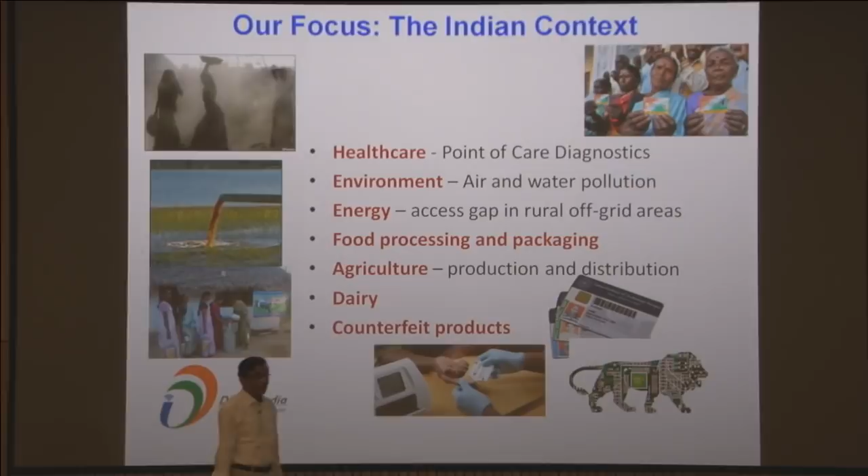This is being done all over the world, but being in India, our focus is of course the Indian context. So all these areas, healthcare, environment, energy, food processing, everywhere this technology, as I will illustrate, can actually revolutionize the field.

And what we have at the center, I will quickly go through, because I am speaking on behalf of the center, and everything that I will show you has been done by these 100 people working behind us. So we have components. I'll explain some of them. The major thing in electronics is we have components, but those components have to be integrated into applications. All right.

So we have been working not merely last year or 2 years before. This center has its beginning in year 2000. So we have been at it almost 18 years. First 5 to 6 faculty members with 10, 15 students, and now we have about 7, 8 faculty members, team leaders of 12, 13, and with 120 people. But it's 18 years of journey to where we are at the moment.

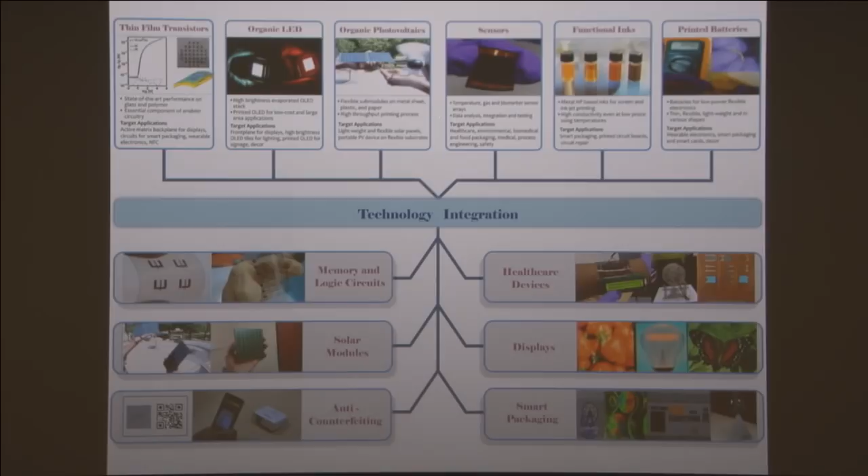In the next 60 minutes or so, I'll tell you why flexible, and worldwide efforts, what kind of efforts are going along, and give you a primer of the key problems. I will not do very complicated applications; semiconductors that you have studied, we will also do that. And so we will do materials and inks, and it is flexible. Once it becomes flexible, we can print. So printing electronics I'll do, and I'll summarize with current challenges. That's our task. Let's go.

So diodes. You have seen components like this, diodes, transistors, but these are discrete. And then if they get integrated, they become, what is it called? Integrated chip, IC, right? So can anybody tell me how many transistors a typical computer chip, a Pentium chip, has in it? Have you studied? Has anybody told you so far? Pentium is a computer chip, right? How many would you guess?

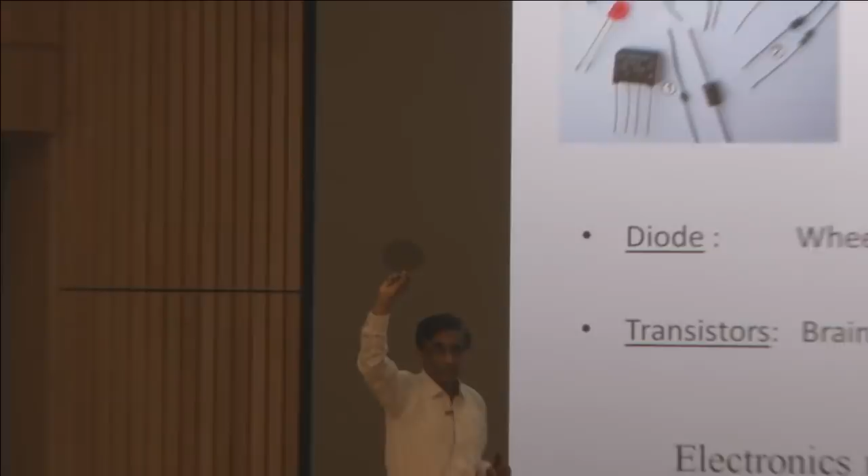And you know, humans lived in the Stone Age, correct? And after Stone Age, which age came? Iron Age. Some people call the recent age the Steel Age, for the amount of steel that we use. But what is our age? Can you name a material which will characterize our age? Stone? Brass? Steel? Okay, I'll hold something in my hand. Can you tell me what is this? Glass? So somebody is saying it, so I think they deserve a chocolate.

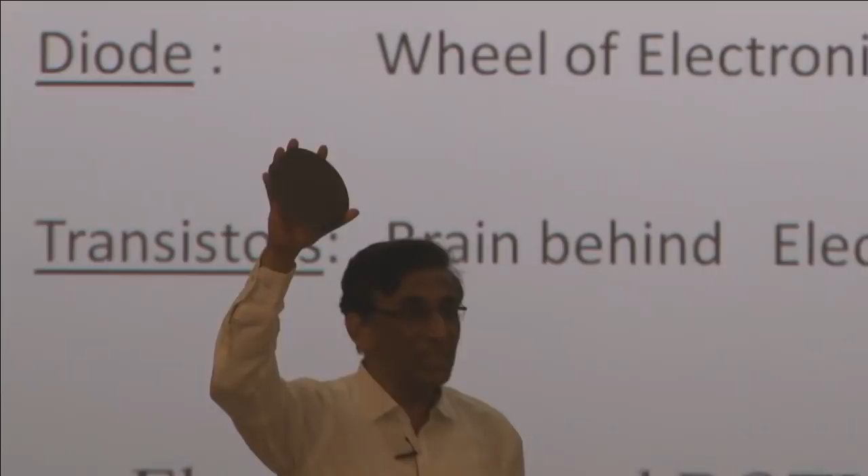This is a 6-inch wafer of silicon, on which you would have many computer chips, like 1,000. This comes in 6-inch, 8-inch, 10-inch, even 12-inch now. And so all your computers are made on top of this, and then they're split and put into a computer. That is why it can become so cheap. You can make thousands, each one containing billions of transistors. So that is the power of conventional electronics.

Except that, if I drop this, this will break into pieces, right? And this is a part of a single crystal. Have you studied crystals? So this is a single crystal which weighs hundreds of kilograms. One crystal, which is grown, and then you dice and cut and make wafers like this. So in conventional electronics, everything, your mobile chips, are made with things like this.

So you require one single crystal of silicon, and from that everything is made. To make that silicon, you have to go to very high temperature, the melting temperature of silicon, to produce one crystal, and then lots of other things are done. So it is brittle, and it requires very high temperature, and hence I cannot flex it. I feel like breaking it. Okay, I'll not.

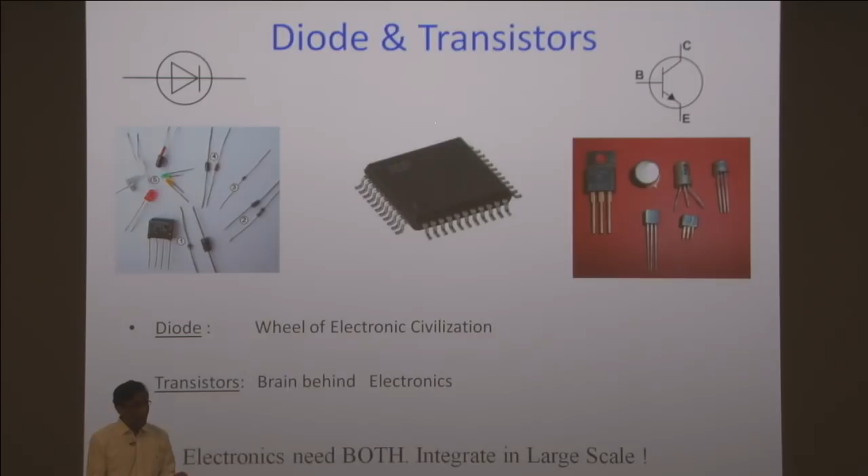All the controls come really because of transistors, and you put them together, and then you get all kinds of electronics. So if I have to do flexible electronics, I have to get every component in a flexible form, and not on silicon, which requires extremely high temperature and is brittle. So that is the challenge.

So what happened? Can you locate silicon in this? You remember this, right? You have seen this. Where is silicon in this? Silicon, group 4 here, right?

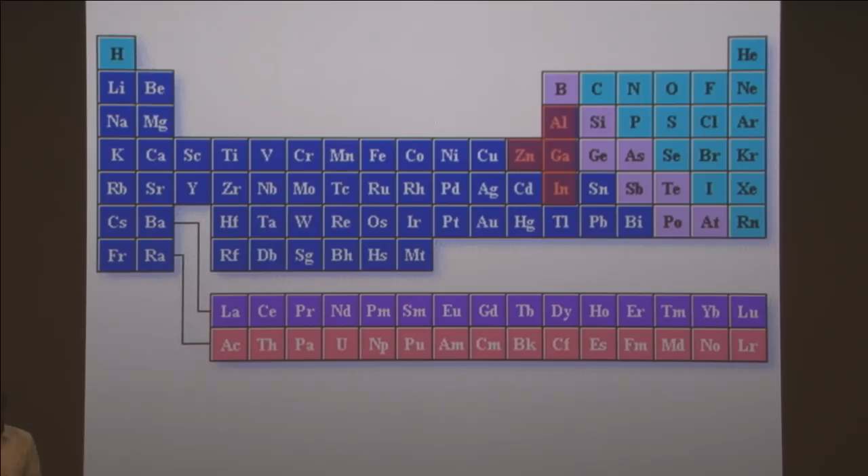So our age is called silicon age because information, electronics, all computers are at the moment controlled by silicon. So you can call it silicon age. Some people call it information age, and soon we are going to call it AI age, artificial intelligence. Everything is artificial intelligence. So the mobiles need not be only smart, they have to be also artificially intelligent.

They can do translation now, right? Google phones now can do translation as you speak. As I speak, it can be translating it to Hindi, I believe. I have not used one so far. So this electronics has some of the problems that I told you.

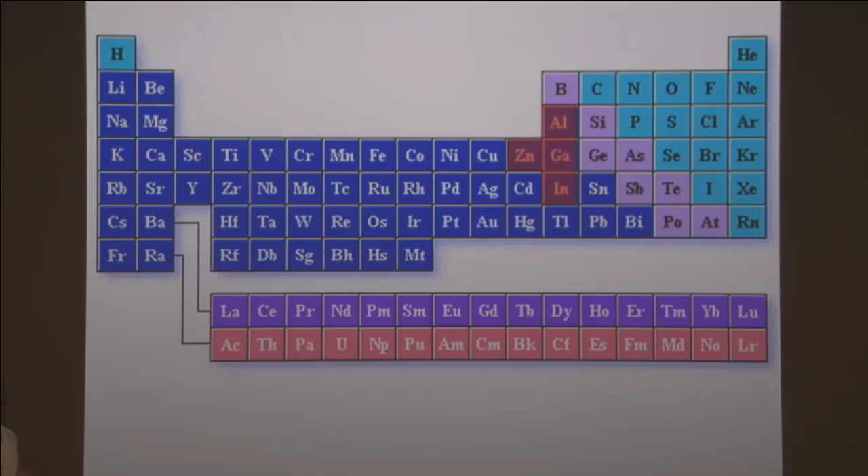So the alternative that is emerging for the last few decades we are working at in the labs is based on carbon. Carbon is also in the same group. So carbon based electronics of various kinds are coming up.

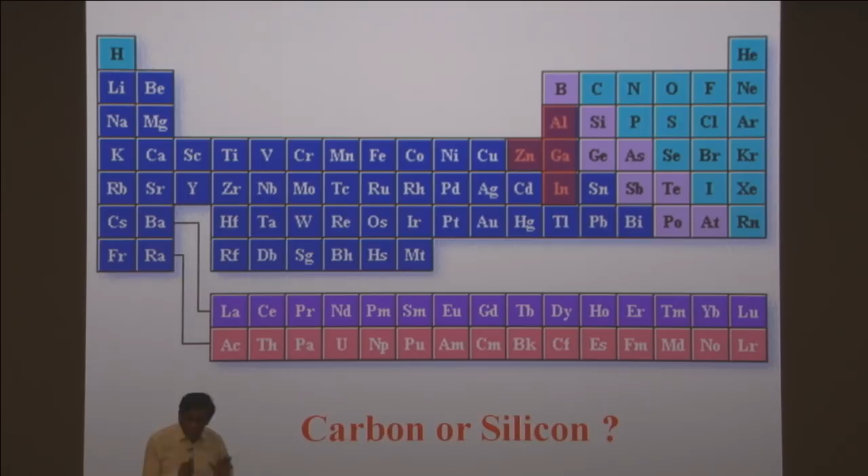But why have I kept this here? What is carbon here? This is organic, not inorganic. Every organic molecule is also carbon, hydrogen, and oxygen. So can we make electronics out of that? And organic cannot go to that high temperature. Silicon can be melted, but organic molecules can form electronics at very, very low temperature. So that is a possibility.

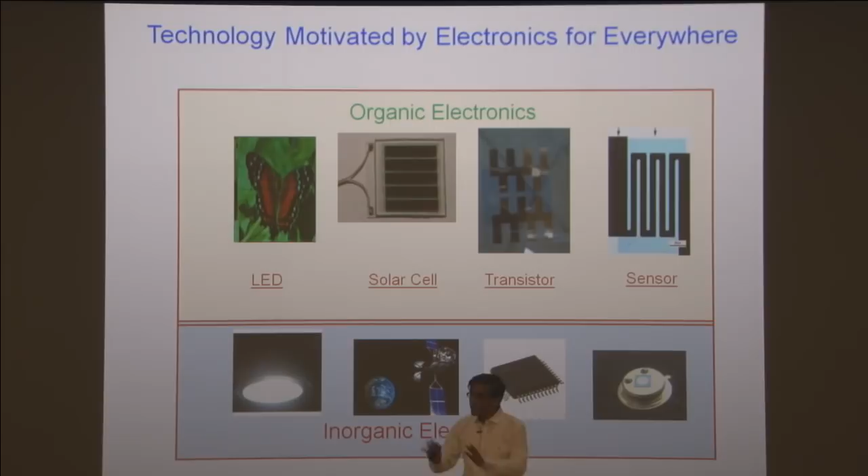So for one-to-one correspondence, whatever is there in electronics, there is an effort to do that, but not to replace silicon. In fact, there is almost a theorem for us: what silicon can do, don't try by any other method. It's what silicon can't do, that you do.

What silicon cannot do is make a display like this. But since my plastic can become an LED, I can coat plastic at very low temperature and make a huge big display, which silicon or gallium arsenide cannot do.

With silicon, I cannot make electronic circuits which I can wear, like a jacket. But if all the electronics is plastic, I can wear it, right? And it can be extremely cheap.

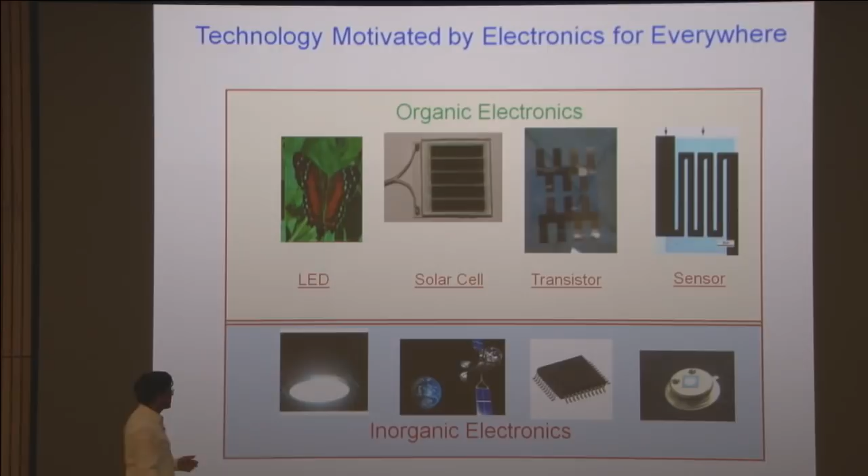To make a crystal like that, you require a billion dollar factory. To make this is very cheap, you can do it in the lab. So it's not only flexible or bendable, but also large area. Large area at low temperature, and if you do large area, then the cost is also low. So it's large area, cost effective electronics that you are looking for.

So typical components, why is it very simple? You don't have to worry if you don't understand, but take, let's say, plastic instead of glass, and simply put one layer and another layer and a third layer and make a device. It's not like a huge factory that you would require.

I will not press on this at the moment. There is nothing at the moment, none of the products still which you can go to the market and buy. But there is a huge effort to produce many new applications. Which means we are just at the right edge of this technology, it has not hit the market, but many people are trying.

So just an example of what people are trying. Let's say you have a packet in which there are fruits, and there's a label which will figure out whether the fruit is fresh or not. Electronically you can figure out, because of the gases that are coming out, or milk, whether the milk has gone bad or not. This is called a smart tag, or smart packaging. And this has to be very cheap, the cost of a small fruit basket, so it has to be a few paisa to be useful for that. So you can't have big electronics put there. Electronics can do it, but that is not practical.

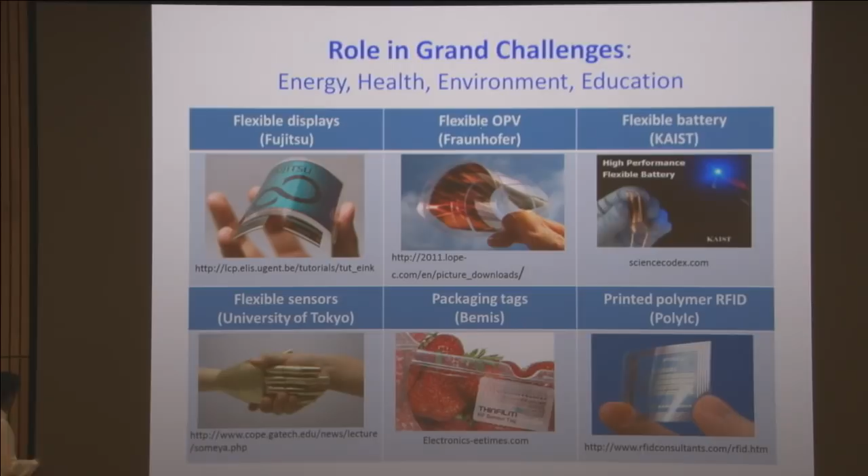This is the most interesting. A Japanese scientist is actually working on, suppose a robot. A robot has to have skin. So what will that be? The electronics which has diodes and transistors and sensors will be there, and that will be like the robot skin. If we can put many kinds of transistors on plastic and make artificial skin, then when you are handshaking with the robot, it also knows what pressure you are giving, or who you are, because of the sensation, and the sensation must be through these electronic components that are on the skin.

Some of you are using badges, but now in our institute also ID. These IDs are dependent on RFID. Have you heard of RFID? No. Okay, so the ID tags we can make cheap.

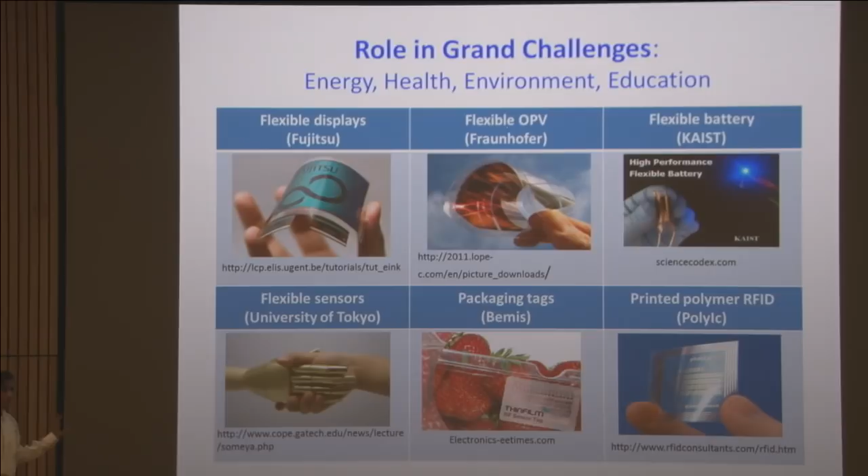There are many such applications people are trying, but none of them so far has become commercial to the extent that you can go to Kalyanpur and buy it. But that is the success of technology, when some of these things hit the Kalyanpur market and you can go and buy it.

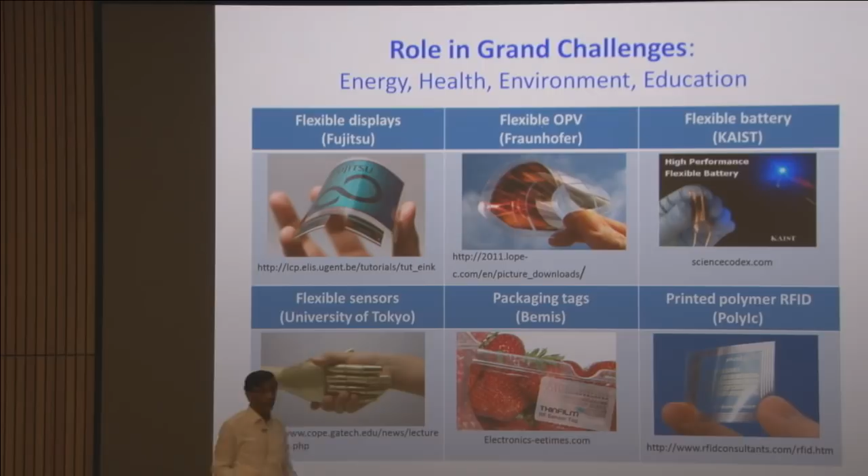In fact, it happened with white light LED. When it hit the Kalyanpur market, they got the Nobel Prize. Three Japanese scientists had been working all their life, but they had to wait to get the Nobel Prize until it changed life. It saves energy and changes life. So this is going to do that too.

There are, in medicine for example, a diagnostic patch. If it is plastic and can do electronics, it can do a diagnostic patch, or a full laboratory on a chip. There are experts here, but I'm just saying there are many applications coming up because it's cheap, it's large area, it can be done on plastic, and it can be done in many different ways.

In fact, we all keep on saying that this area is currently limited by your imagination of what kind of application you want to put it to.

But it has to become viable and it has to become a proper technology. So that technology development work I would like to illustrate. So to summarize a little bit, the conventional electronics was microelectronics, or I was almost going to say nanoelectronics. This electronics that we're talking about is macroelectronics. In fact, sometimes we say it is meter electronics.

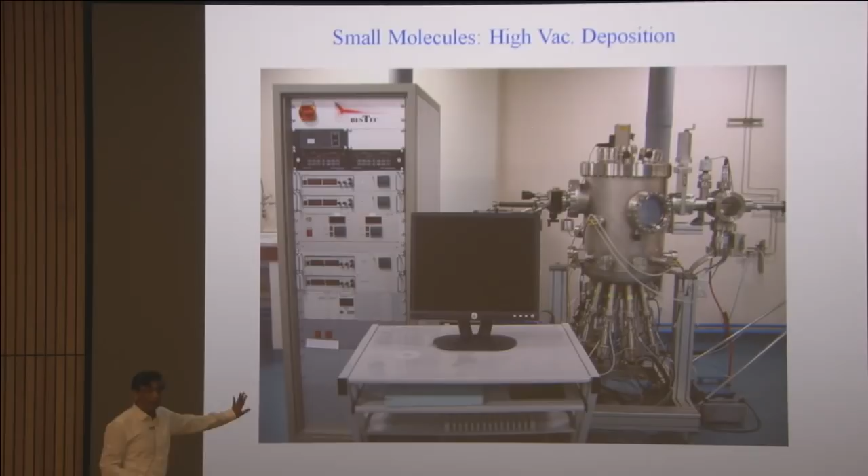However, small molecules require vacuum; they get evaporated and we can make devices. But then it will be small, right? This cannot be made over a large area. There is one company in Germany that has been trying that even on a very large area, so people are trying. This is also plastic electronics. Or you can do it in the lab: mix a solution, and chemists are magicians. They just do this and a new molecule comes out.

In conventional electronics, we are limited by silicon, gallium arsenide. In this electronics, we are not limited. Every day a new molecule is invented. They keep guessing what will be useful to us, physicists and engineers, and chemists keep producing new molecules. There are hundreds, thousands of them to choose from, not limited by one element, silicon, this element or that element. So this is a simple process, that is solution processing. So either you can do it by evaporation or by solution processing.

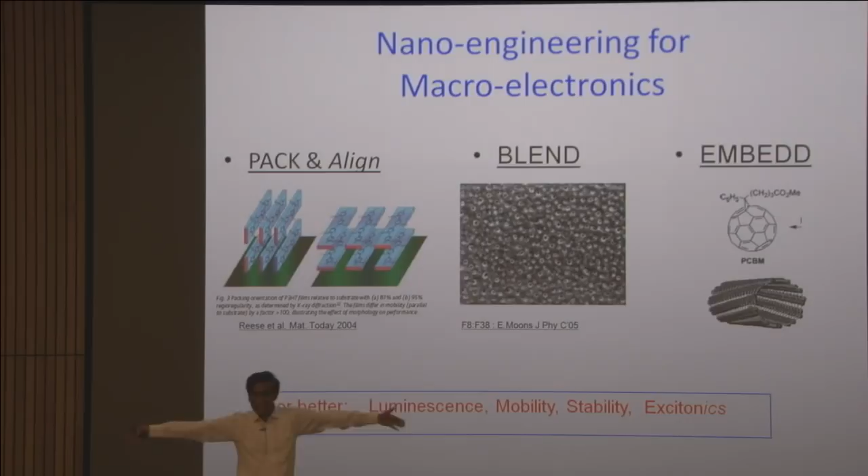I'm talking about macroelectronics, but these properties are actually controlled at a very molecular level. So this is done by nano engineering. In fact, we embed buckyballs into our devices to control their properties. Inorganic nanoparticles are embedded, or we align them or blend them. So nano engineering is required even to control properties of things which are in meters. Let's go to the first example that I want to give you.

The first thing is, if I want a circuit to be made, then the circuit has to be connected, right? So how do I get metal on plastic? I have to print or do something, so I require conductive inks. Is your normal pen ink conductive? No. So we require conductive inks to do that. We have a group here working on all kinds of inks, but I'll demonstrate to you today some conductive inks done on plastic.

So this is the conductive ink group, all of them are here. While going out, you will see many more demonstrations. But I'll just tell you the basic principle. So first we make what is called a nano ink, of semiconductors, of many different things.

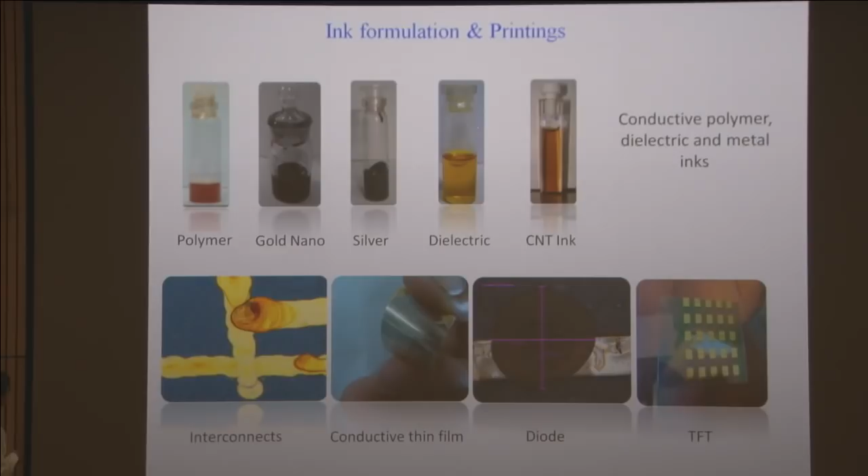I will not explain that to you, but it's actually ink: polymer, gold. Gold, when in very nano form, 2 or 3 nanometers, actually looks black like this in a solution. Silver, some dielectric ink, this is carbon nanotube ink. We can make such inks in the lab and then put them on; for example, here you can see gold on plastic for TFT.

A diode has been made. This is gold on the plastic. I'll come to this for interconnects. So the first challenge is how can I make interconnects on a plastic. In silicon, what they do is put it inside a vacuum chamber and evaporate. The gold melts and then evaporates and then makes an interconnect.

But here, a plastic sheet, what temperature can it withstand? Maximum 160, 170, and that is also very specialized. Otherwise, it will buckle. So how do I put gold or copper or silver on plastic? That is a challenge. I'll quickly show you what we do. The melting point of gold is 1064 degrees Celsius. But if we make it very small, 1 to 2 nanometers, there are many gold atoms.

It is not really the melting point, but the sintering temperature can be brought down how much? From 1064 to 153. In fact, if you have silver in nano form, there are many more atoms at the surface. The atoms at the surface are extremely active compared to the bulk, and hence they would not like to remain in nano form.

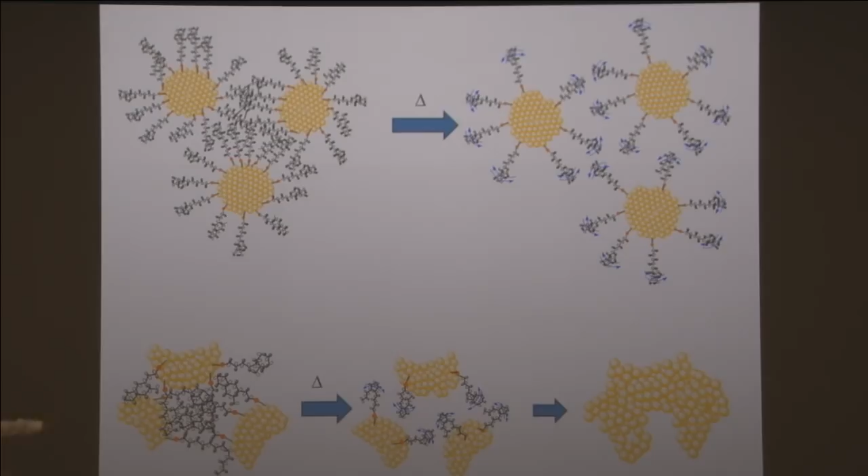So this is the gold ink, and once it is heated, it becomes actual gold. This is the black ink. Why is it looking black? Because there are nanoparticles coated with organic molecules, so they remain nano. And once I put them on there and heat it, when the organic molecules go out, they become gold. Let us look at it in a video.

This, where is the video?

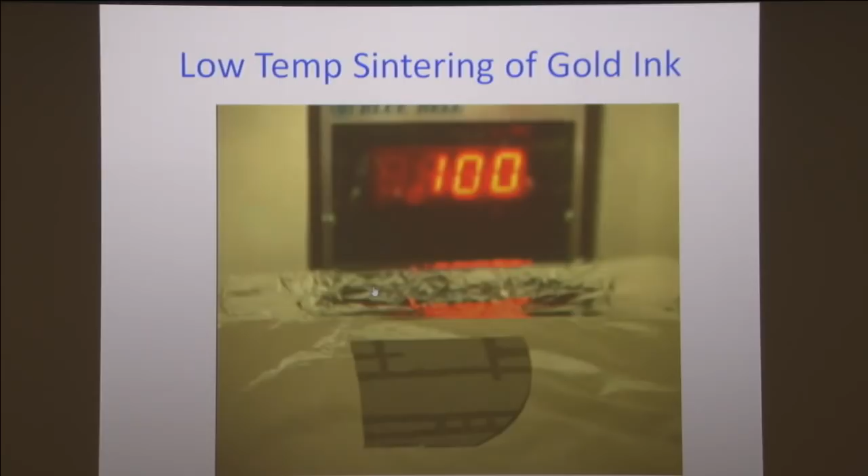Okay. All right. But why is the video not working? Huh? Yeah, but I didn't want to do that. Okay. I thought it was embedded properly. I tested it out, but okay. So.

Okay, so you can see this is now heating up. This is the temperature shown here, 140. This is still black. You can see this black slowly turning. Okay, if you can run it again. Okay, so it is now perfect gold. So it's come down to about 140.

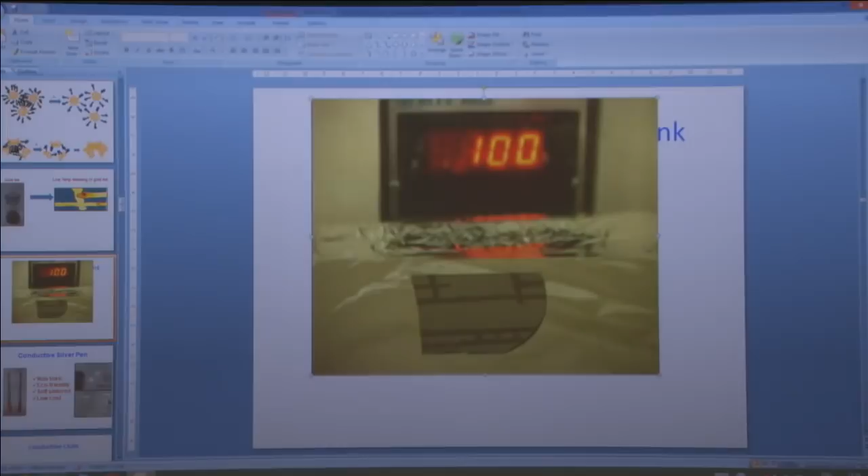So it is black, and I was monitoring the temperature while I was heating it. It started around 145, and by 153 it has become totally gold. In fact it's actually at 145 degrees, except that the temperature is not uniform, and hence by 153 it's absolutely okay. So let's go back. So that is one way of getting that.

Using that, we also have pens, like normal pens. We have made silver ink which doesn't even require any heating. These look like normal pens, but they have been filled with ink which has silver nanoparticles. And hence, when I write, I actually make a conductive pattern. All right, so let's look at one such.

So these are paper. This is some glossy paper, okay, on which we just write with this pen. It can make circuits. Wouldn't it be nice to make it yourself? You can actually make whole circuits. Otherwise, how do you do it?

Normally, you have to give a drawing to a PCB, somebody who makes a printed circuit board. It will be etched and it will be on a hard board. Here, if you have this pen, you can simply draw your circuit and mount components. All right. So let's... Okay. So there are some dots. So I have one component. Okay, let me just, so first...

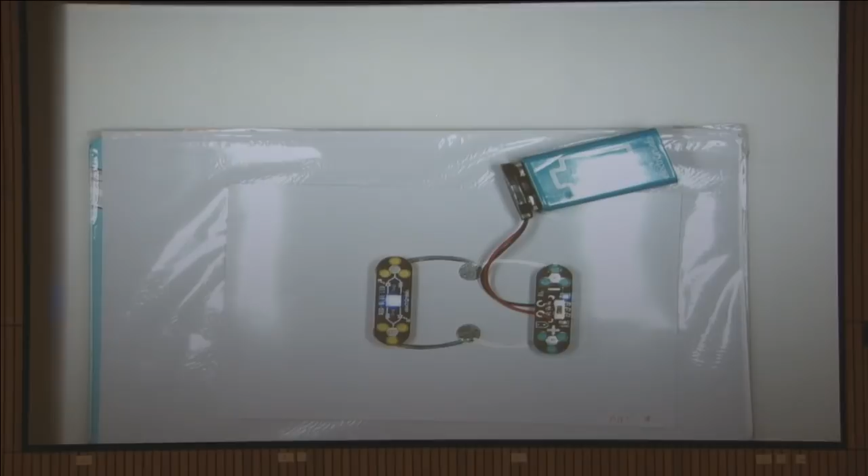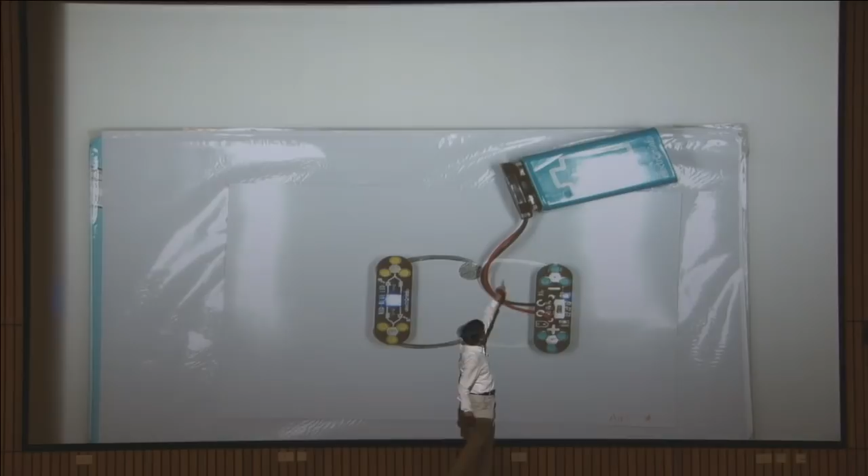All right. So I don't know if you can see, it is glowing at the moment. This is what I have drawn with the pen. So this is a battery connected here, and this was not connected, and I've just connected it and it is glowing. I think this is saturated. Okay, this LED I can switch off, and yeah, okay. So this is simple.

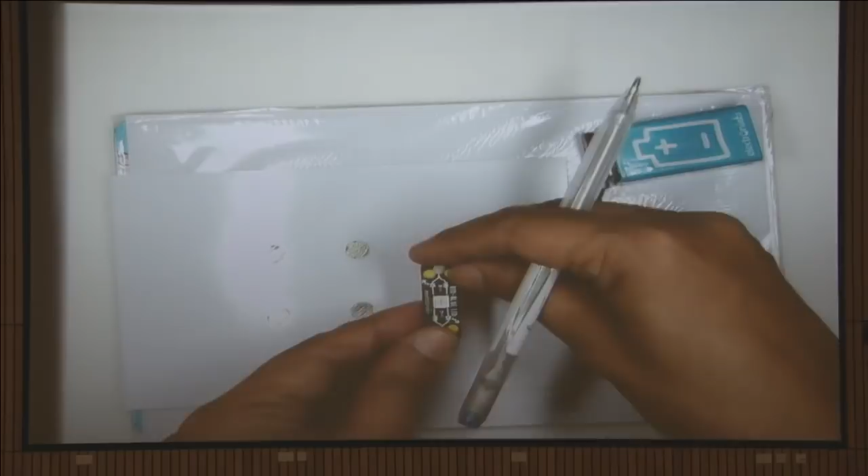We can even do this by connecting it right here. So I put it here, they are not connected. This one is on because it's connected to the battery. But now, if I connect, this is my pen. I am not doing it very neatly, but you can connect it, and that is that easy.

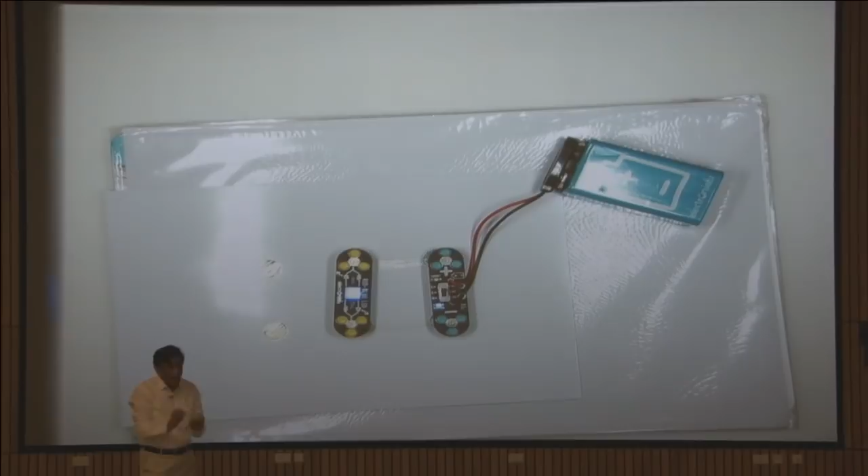All right, so it's now glowing. Okay, so we have several such pens of different kinds. I'm just showing it by one line, but actually you can make many things. Some of them you will actually see outside also. All right.

Now that I am here, how about this? This was on paper, but we took a cloth like this. It's like magic, right? This is black cloth, and then we printed our similar ink, not the same, similar ink on it. Okay, this is cloth. So now if I connect an LED on this cloth, do you think I can make a connection between the two?

This is simply black cloth. This is just to prove that black cloth is not conducting, right? That I am sure you will know. But now I take this cloth, and now connect one end to... my hands are slipping.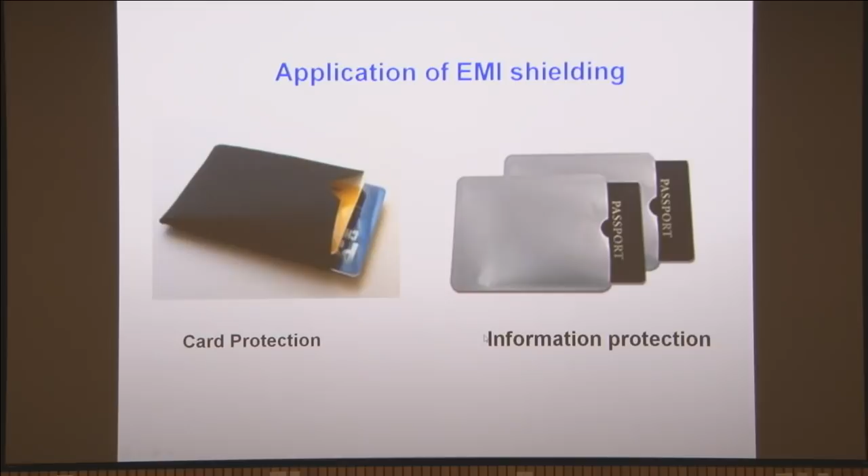Let me go to the next application, which is what I started with, and that is organic light emitting diode, right. So light emitting diode, which was inorganic, could be made on, right. So this, let me, or we have a group which... where's the pointer?

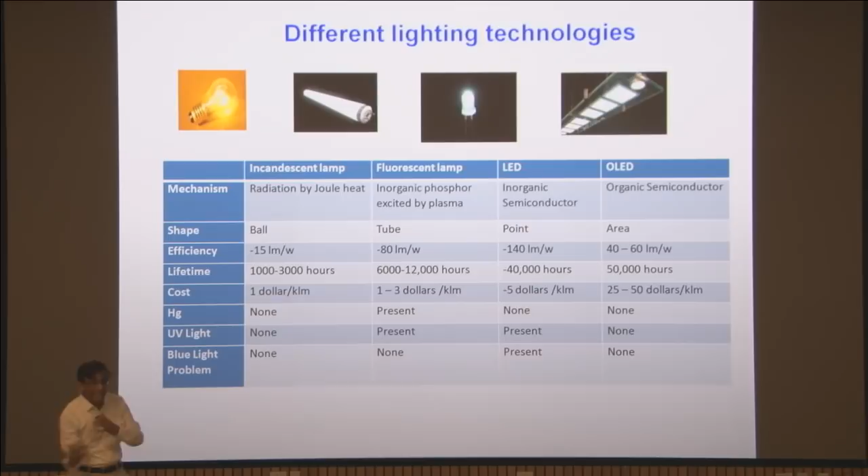Not only that, just like a fan regulator, you could actually change the color. You would have a color change, or maybe with AI, it will sense your mood and change the color according to you. If you are in a depressive mood, the artificial intelligence can sense your depressive mood and make the room brighter and lift your mood. So all that is possible because it is large area, and now it has become an architect's delight, to be able to integrate it into the architecture.

So let me see how it is made. It is very simple. That is the substrate. The substrate could be plastic or glass. On that there is an anode. Any electronic device has an anode and a cathode, and in between several layers, except that these layers are very carefully controlled by the machine to have only hundreds of nanometers of a particular material.

And this is the heterostructure that I told you. Different kinds, that was actually a breakthrough. The breakthrough was that you don't try only one kind of material, but several kinds of material in a series, and this was the heterostructure. This is what we learned from inorganic semiconductors. And that worked after many, many years.

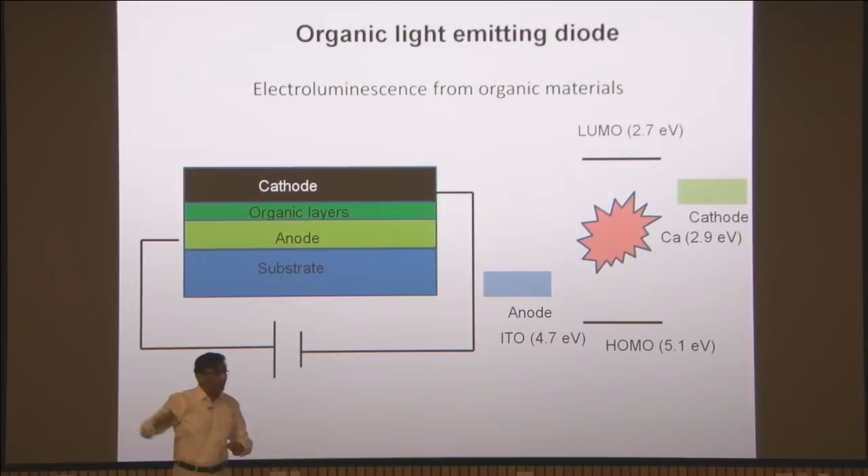So once you connect it, the hole and the electron go into that material, and they recombine to give you light. It is a simple principle, but making it is not that simple, as my OLED team would tell you, but I will show you some. So this is a simple OLED. This is not like gallium arsenide technology, getting into a big factory and then making these small LEDs. It can be made over large area, so let's see how it is made.

So one way it is made is actually vacuum technology. Just 50 meters from here, we have a machine which has a central robot, and these several layers of materials are for white light. You require three complementary colors. For example, in your TV, the color is controlled by three colors, right? Green, blue, and red.

So we put materials which will give you that light when electron and hole recombine, green, blue, and red, so that you can get white, or you can just get green, or just red, so we can do all that. So what we do here is you put your substrate into this. I'll show you through a video. It goes in, and there are three different layers. One metal we already prepare and put in, and then we deposit three layers and a metal, and it comes out.

It's as simple as that, except that it is done in a highly controlled fashion by this robot. So you can see there is the metal chamber, organic chamber 1, organic chamber 2, and then there's a cleaning chamber and this glove box. So you put it in and you actually get it back here in a finished form, and we'll show you that.

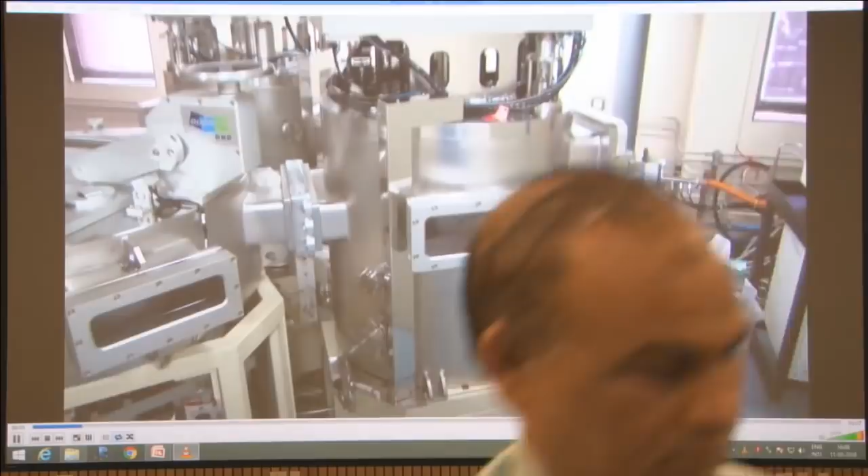This is... okay. So this is actually almost going to the lab. This is just nearby, next to this building. All right, so you can see this is one of the chambers. He is putting the substrates there so that he can handle it. So this is the substrate. He is handling it in the glove box.

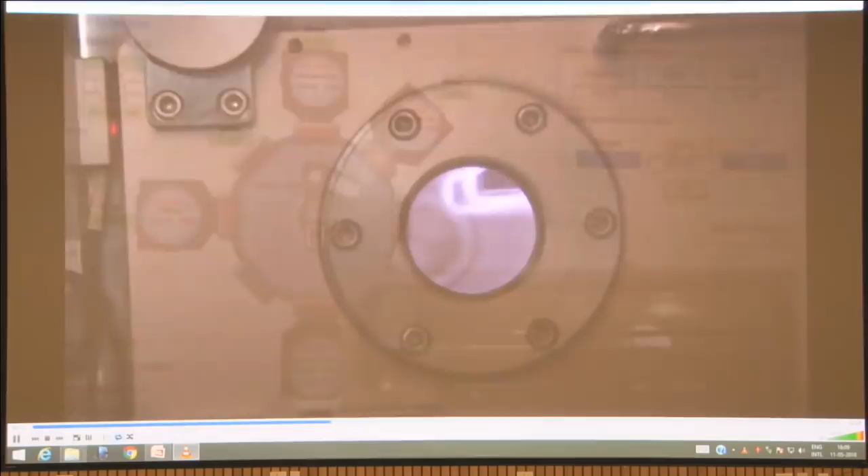You can see he is wearing the glove. He is not touching it directly. So this is that glove box. He put it in and it went in. Then he comes. It is completely controlled by the computer after that. So this will take it to the right chamber. The vacuum is changing here.

You can see that it has taken it to the chamber, deposited there, and gone to the next chamber, and the next layer is deposited. So you can see that it is going to the next chamber, and after it has gone to that chamber, he just deposits that material. This material is getting hot and is evaporating, right? So the next layer, and it has to be less than 100 nanometers of exact thickness. Then three such layers, and it comes out.

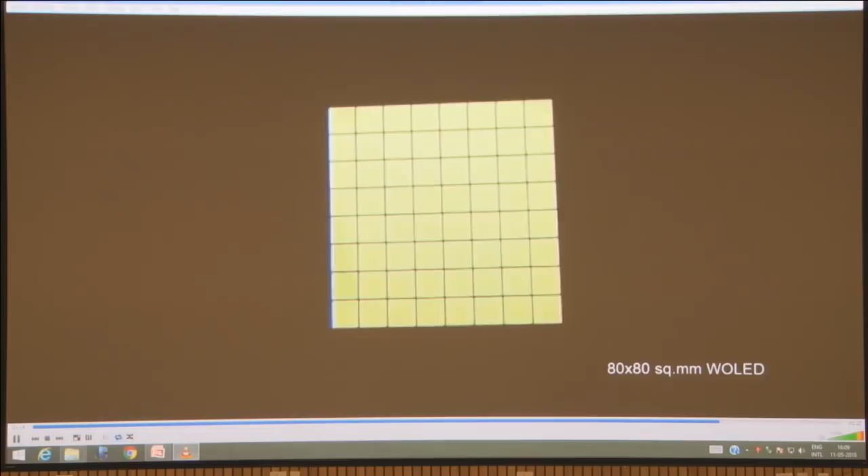And now we are applying current to this OLED. You can see this white. As the current is increasing, it is becoming whiter and whiter. It has become totally white light. So you can make tiles of these, or if it is flexible; this has been shown both on plastic and on... All right, so just to show you.

In fact, lighting is... and you know how much lighting costs in a building typically, in terms of energy? 30% of the energy that a building consumes is roughly lighting. And these are extremely efficient because there is no heat. And so I will not go into that.

So it can be done, and our printing team has also done a 7-segment display. All these clocks, that one clock there, is a 7-segment display of conventional electronics. That big watch behind has a 7-segment display. All your LCD watches are also 7-segment displays. So we have done that on flexible. And some manufacturers want it for equipment like weighing machines or even petrol pumps, which we have already shown.

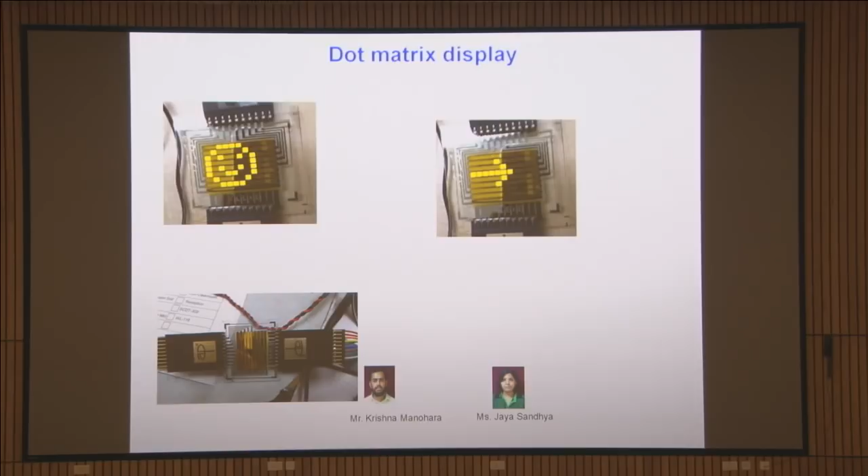This is of course one color, but it can be done in many different colors. We have a dot matrix display. That is a 7-segment only, but in dot matrix you can have even characters. So we have also made dot matrix displays with this. This can also be in multiple colors. I'll just run through some of the applications that we have done.

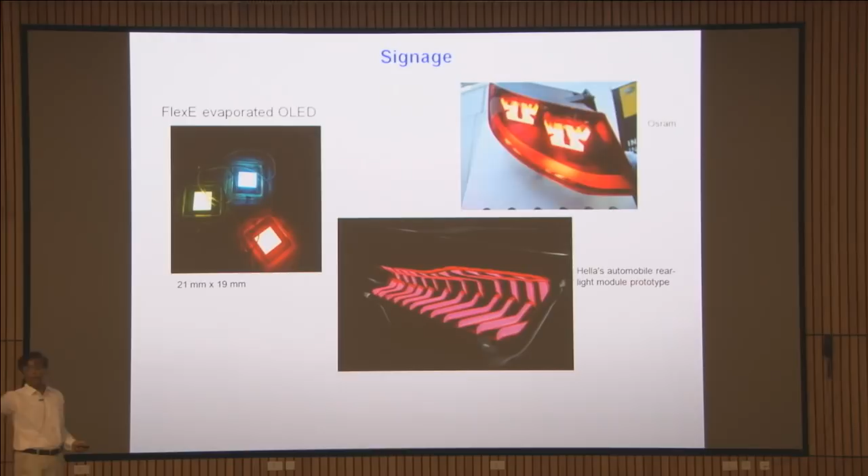These are OLEDs developed at the center, but this is vacuum evaporated. And people are already doing it: Osram is doing signages, and Hella automobile signages. This is slowly getting into the market already, especially the high-end automotive market.

So print, what is printed? For example, newspaper is printed, and it is printed for how many copies per day, because the rate at which it's printed, every day you have new newspaper for so many people in so many millions of copies. That's because of what is called the throughput, at what rate you can actually print them.

So now if electronics can be printed at that rate, it will be really cheap, and since it's in plastic, it can be not just on plastic, you can do it on paper, and I've shown it probably on textile and cloth.

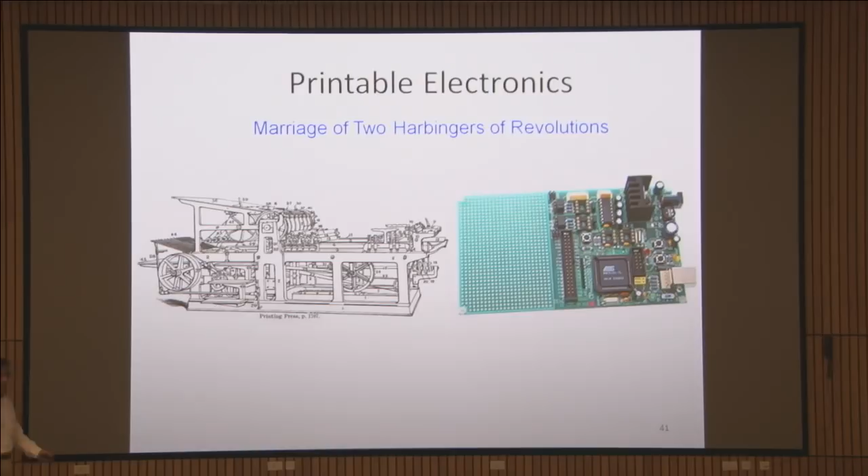So let's see printing. The real power of this technology comes from the fact that it can be printed. These are the marriage of two different things. One actually changed human society - this was 15th century Gutenberg's printing press - and the other is real conventional electronics. So if you marry these two and print electronics, there are two revolutions combined, so obviously the third one will also be a revolution.

So the key thing is that it has to be large area processing. It is not a small area 6-inch wafer, it has to be extremely large, and it has to be fast, the way cloth is made, at the same time. So that has to be done.

So let's show, this is taking a little bit of time, but we'll do this. So let's see printing being done in our lab here, just next to. Okay, so this is a screen printer.

We have all kinds of printers, we'll show you later. So this is screen printing of a circuit being done. It now deposits a layer of conductive silver on top, and now it presses it through. Then again for good thickness, it puts it again - so 2 layers.

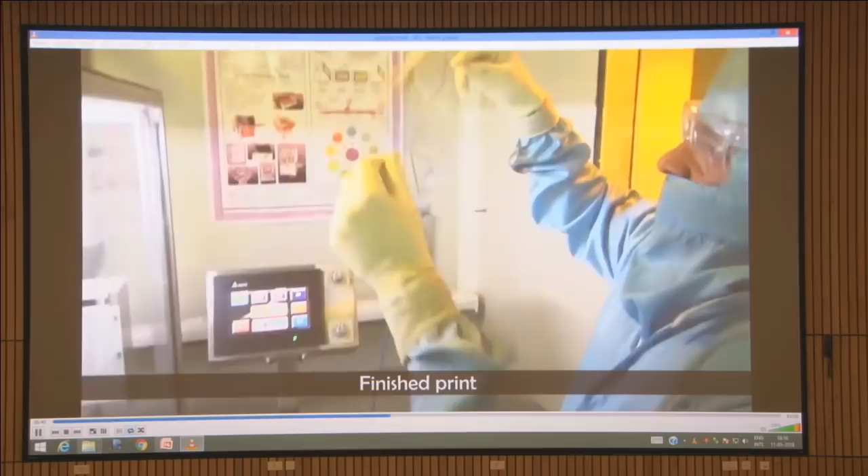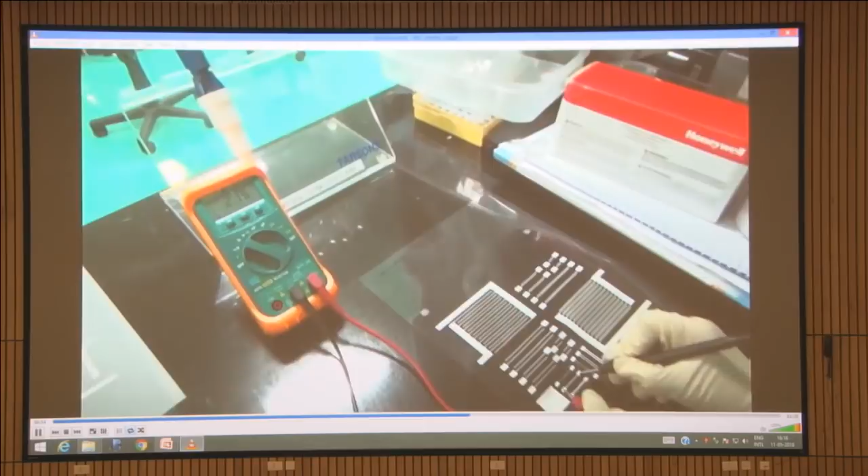So just like you print banyans, you can print circuits. So it is collecting, and this is a large area, A4 sheet. So this is sheet to sheet printing, right? And you dry it for 2 minutes, and the silver tracks become conducting. So you can now make complicated circuits just like by screen printing this way.

Let me get back. So large area printing has become really industrial. This has the capability of making it industrial. And what I showed you is sheet to sheet.

But what we want to do is roll to roll. That is, you mount a roll, and then it goes through printing and comes out with a roll, and then it is sent for applications. That is the real thing, and I'll show you.

So we have at our center all these different kinds of printers, because we do not know for which application which one will be the best. So we have all kinds of printers. For example, even this is like your normal inkjet printer, except that we print materials here - metals, semiconductors. So we can do inkjet printing, we can do all kinds of printing.

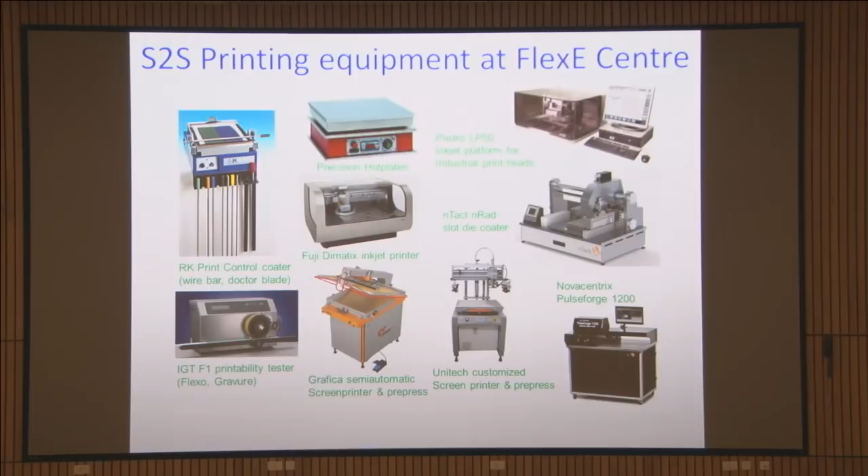I will not go into this - this is also another big inkjet printer in the lab we have, but this can handle much larger. So this is S2S, you'll remember - what is S2S? Sheet to sheet printing. And what is R2R? Roll to roll. So you'll remember these two words, right? So these are two different kinds of printing.

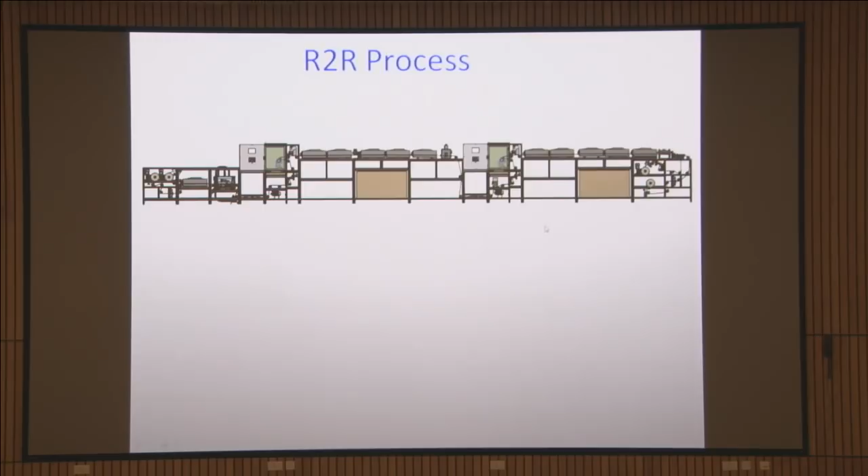So this is the R2R process, you can see what happens - R2R cleaning, printing, drying, then we can do sintering. This is for making a heater, and you can see the way it is going, and then finally it is drying.

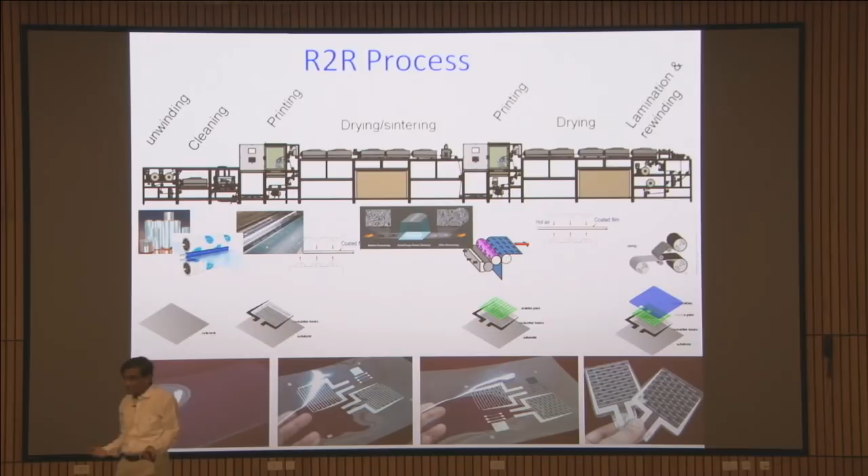And then finally you have got something which is called a plastic heater. You know why plastic heaters are important? Unlike a regular heater, it can be inserted anywhere - for example, in your seat cover, or inside your blanket. So there is a huge demand for heaters which can be inserted and are flexible.

Okay, so let's go to solar cells. We have in IIT, you have seen these solar cells, right? These are all hard. There are different kinds of technologies - amorphous silicon, multicrystalline silicon, and so on and so forth.

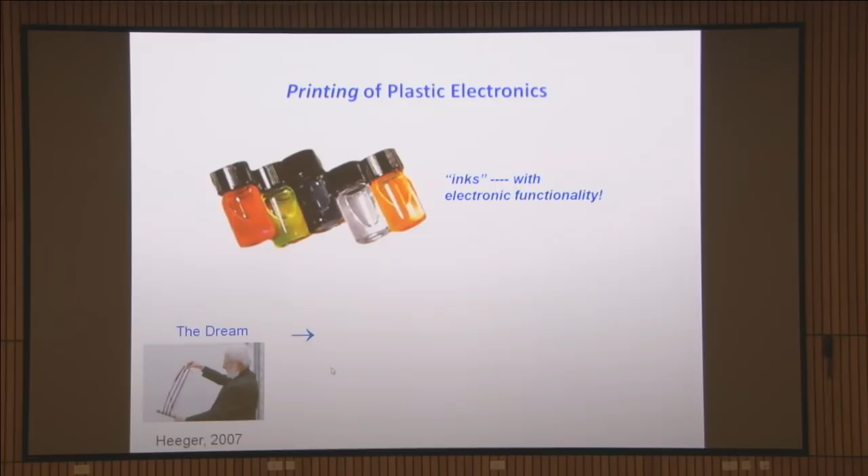But for solar cells, the dream of Alan Heeger in 2007 was that you actually make inks such that they can be printed. This was the dream in 2007 - that you print solar cells with the kind of inks I talked about, on a plastic substrate, such that it can ultimately be printed like a newspaper.

Solar cells - here is one example. This is a solar cell printed on this. So soon we are going to print this on a large scale on the roll-to-roll machine that I'm showing you at our center.

So compared to this, of course there are such things available. Now you can imagine, this is not so flexible - it is flexible, but it has to be like this. This is also a thin film silicon solar cell. But that kind of silicon solar cells you can actually make in any shape you like.

You can put it on your bag to charge your mobile, carry it on the go. A soldier can make his shirt a solar cell, such that if he's in Ladakh, it gets power from his shirt, or a tent - you make a tent with this and get power from the tent itself. The kind of power it provides, and the very fact that it is extremely lightweight.

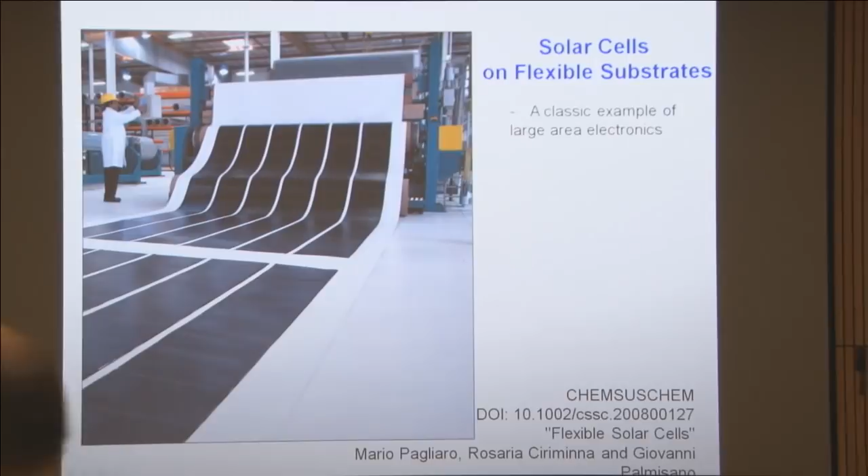So I am not doing very good with time. We will start doing this also, but this is already being done abroad - solar cells. You have heard of this experiment, right? A plane which runs only on solar cells. But this was with silicon solar cells. How wonderful it would be if it were our organic solar cells instead.

Except they should last. So this is the solar cell that we make on paper, not even plastic, just paper. In our center, I'll show you the flexible solar cell. I don't have time, but I'll still show you the solar cell in a few more minutes.

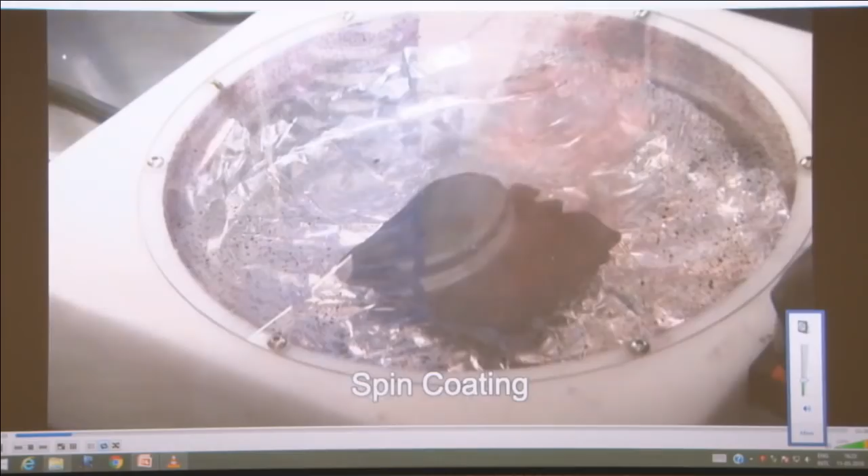I'll take a few minutes now. So we also have - I'll give you some examples, two more examples before I go, and then take questions from you.

Sensors are extremely important - for water quality, air quality, temperature, any variable you want to know is a sensor. But at the moment sensors are available, they are not flexible, not disposable, not cheap. So you would like to make that. We have a huge sensor team in our center trying to work on this.

For example, we have already made gas sensors and a breath analyzer. You breathe out, and the sensors detect things, and from that you can find out what disease you have, because of the kind of chemicals that come out with your breath. So we are also producing a breath analyzer and microfluidic sensors.

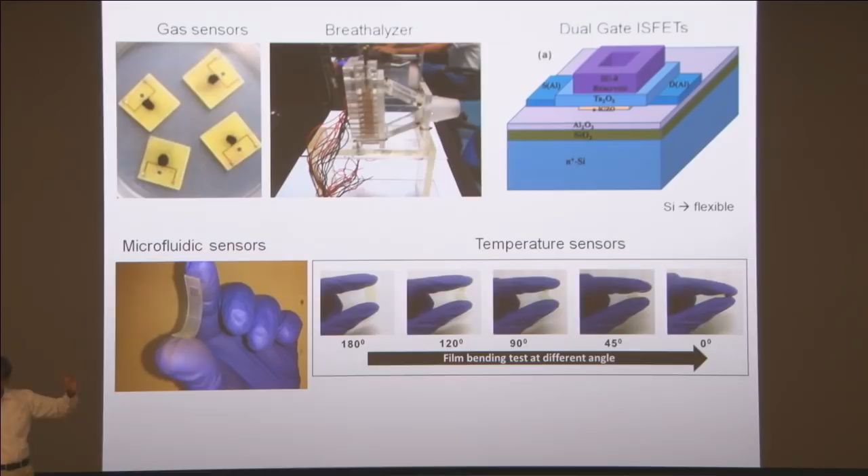I don't have time, so I'll go into this. Since you do not know transistors, I did not emphasize transistors, but really, thin film transistors are the brain behind this whole technology. I'll take two more minutes. So what is a transistor? One of its main functions is that it behaves like a switch - you can switch it on and switch it off. On your laptop, every pixel, or even on your mobile, is bright because this TFT knows when to switch on which pixel and switch off, and that is why it looks bright.

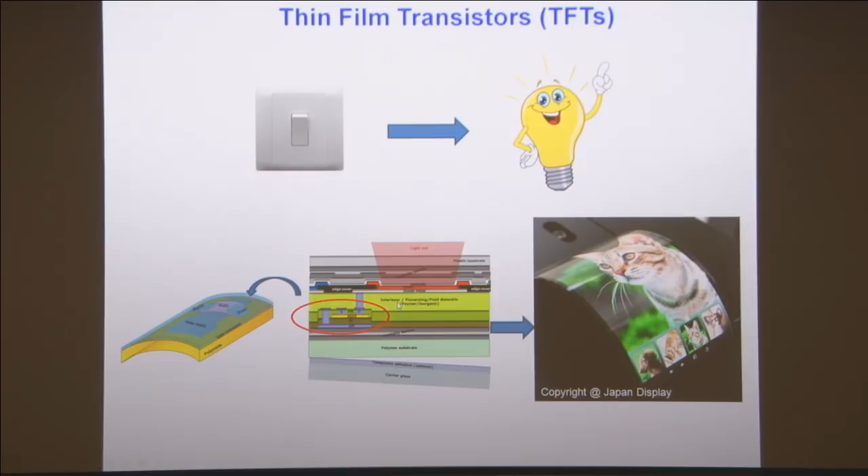Okay, and it is being scanned. If it is flexible, then displays can be like this, and it actually uses a transistor here. So this is the display, but behind it is this transistor, which knows when to put that pixel on and the pixel off.

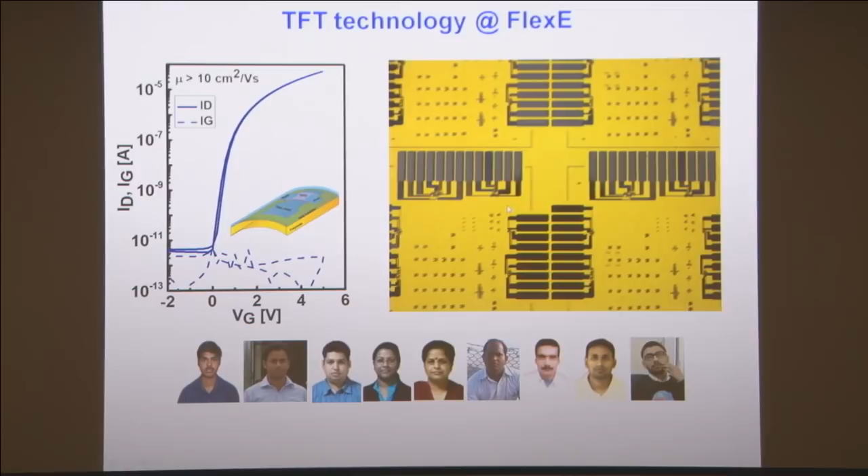In fact, we have already made very good transistors with a new material, a recent material called indium gallium zinc oxide. This is not organic, it's an inorganic material, but you can actually make transistors on plastic. We also print some of these large scale transistors with inkjet.

So let me try and summarize. I will give you a few examples, but let me summarize what challenges you take home, because this technology has not yet hit the market. Let me go through the take-home messages in terms of challenges. The first is low temperature processing, because you are dealing with paper, plastic and textile.

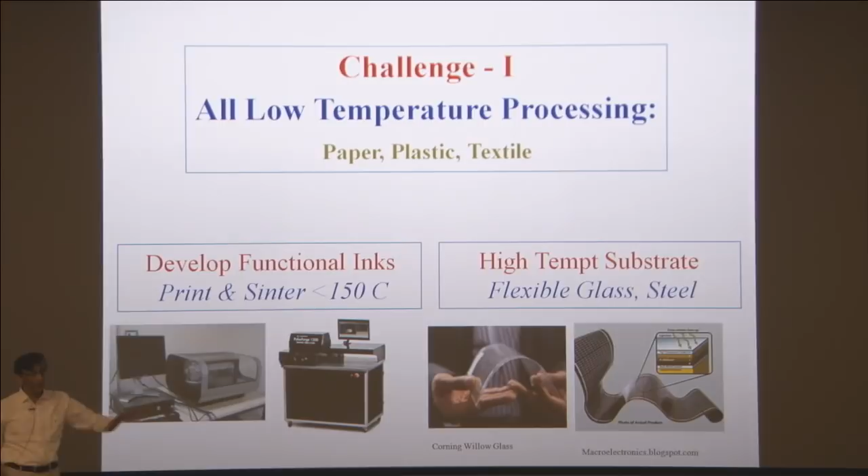What needs to be done? People have actually made glass flexible. Corning has produced glass which is extremely flexible. In fact, you can do roll-to-roll printing on them, but you have to take extreme care. Just as Corning has come out with Gorilla Glass on your mobile, which is tough, they have also made it flexible. So this, or even stainless steel, can be made flexible.

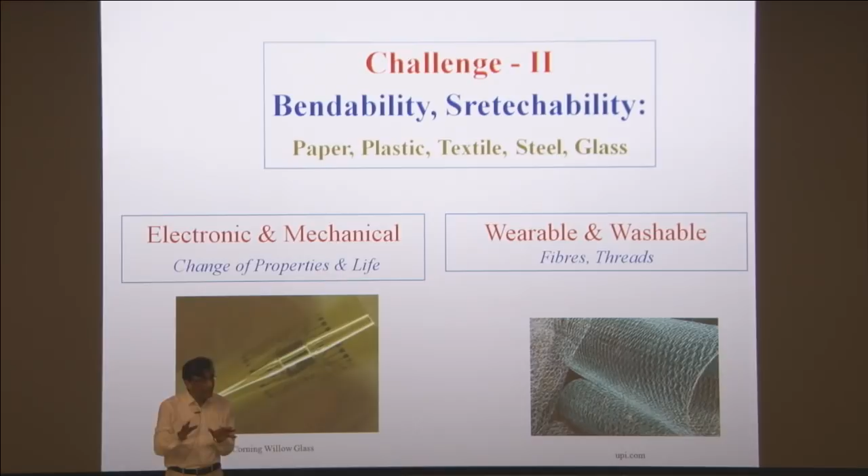Challenge 2: when you bend and stretch. I'm giving you a rosy picture that everything can be done, but there are challenges, and that is why such a big team and center were working on this. It is not so rosy if you see the challenges, but when a challenge is there in a technology, it is our duty to overcome them. So when you bend or stretch, the properties should not change, and that is not easy.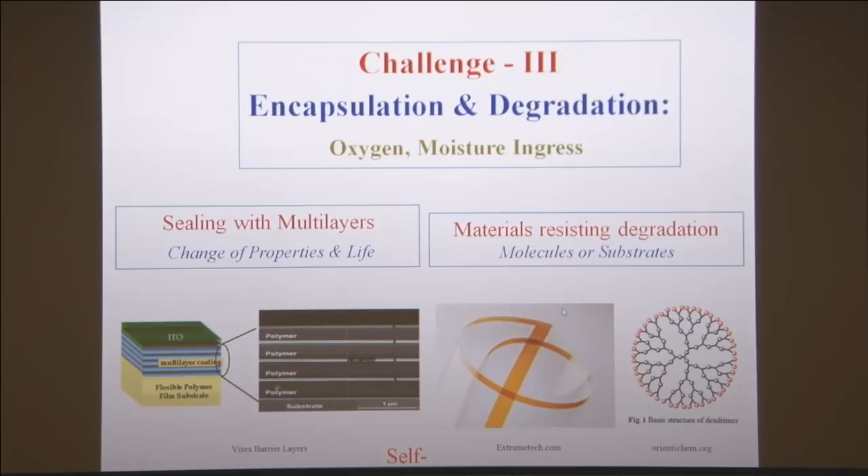So you can wear them and wash them and they do not change, like a T-shirt. Challenge 3: since this is done at low temperature, these devices are extremely sensitive to the environment and oxygen, and hence many of these devices have to be sealed properly such that water and oxygen does not kill them. That is one of the biggest challenges for this technology - encapsulation and degradation from oxygen and moisture ingress. People are trying to think of new molecules that help with that. And of course, there is the large area challenge, which I have already told you about.

So these are the four challenges. Our life today - I said this is a revolution because silicon electronics will remain in their place, but this is going to invade us in every area, in our drawing room, in our transport. Wherever we are, there will be large area electronics, which we call electronics for everybody and everywhere - kahin bhi, kabhi bhi. That is the kind of electronics that plastic electronics makes possible.

Otherwise, some electronics are extremely costly and we cannot afford them. But in the Indian context, this makes immense sense to have it delivered. So this is the dream of our area. There are two dreams of this area which will not reach soon, we know, but we work towards that - having a computer which will be like a pen, a silver pen.

If I do this - sorry, what happened?

Okay, so you carry a pen and then, okay, your computer is not like a laptop, but is like that, right. The other dream is a banknote, okay. So, we recently have new notes, but by the time we had these notes, there are fake notes also. Even these are new notes, okay.

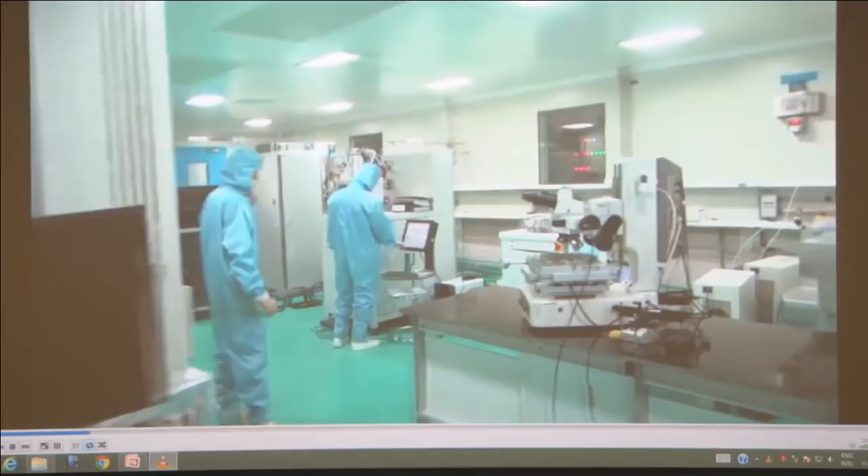We have millions of dust particles per cubic meter here. In a clean room, it will be like 1,000 particles per meter cube. Okay, and hence I can't go in with an open head. Now you are seeing some of the vacuum equipment. I told you vacuum and solution processing. You are now seeing vacuum equipment on the one side.

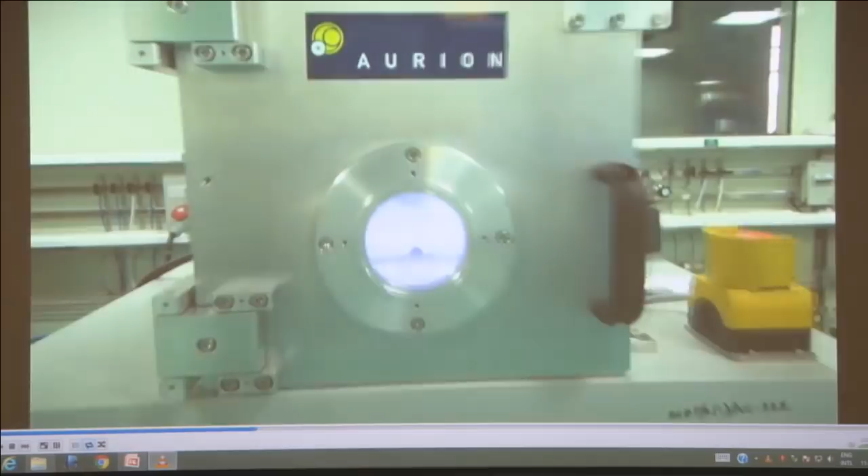They're all computer controlled. For example, he's going to show you etching being done. Okay, a plasma etch. This is a plasma inside the vacuum, which is etching a particular layer. It's a plasma etcher. So now he's showing you. We have lots of this vacuum equipment on one side. Okay, so this is for sintering with photons, drying with photons.

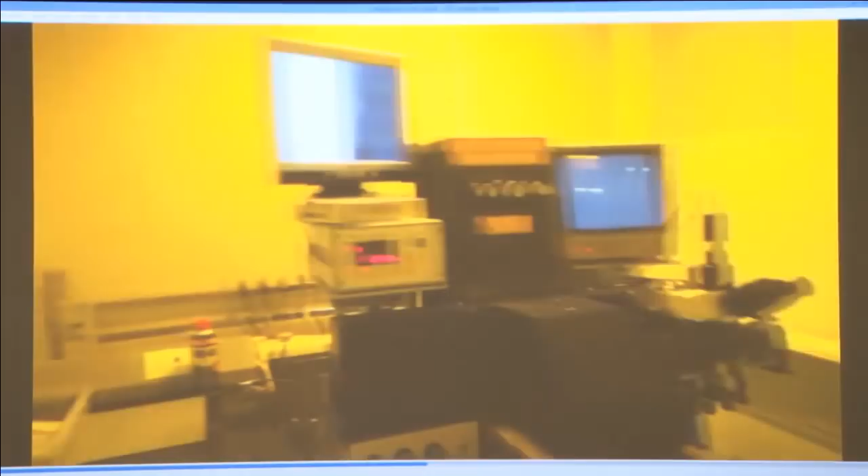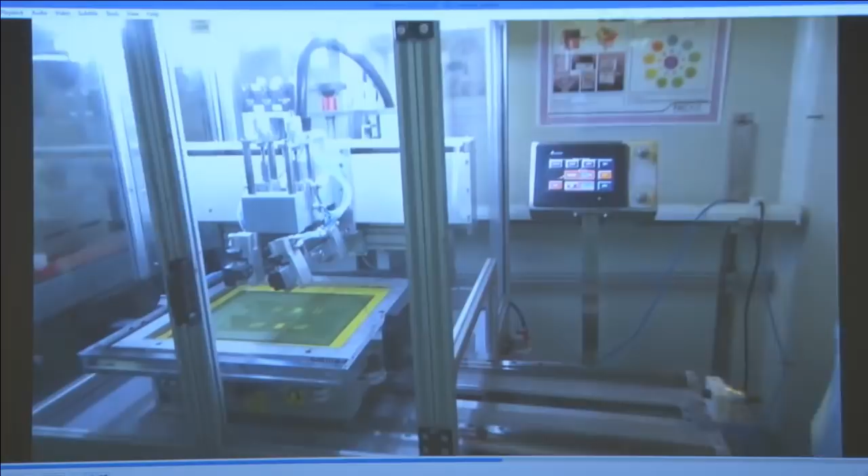And now for making very fine patterns in conventional electronics, we have photolithography. So we do photolithography in a yellow room, and patterns are getting defined now. Now he is going and, like photography, developing it in a wet lab. Okay, now you have seen this printer already. We have many such printers, but this is the automated screen printer.

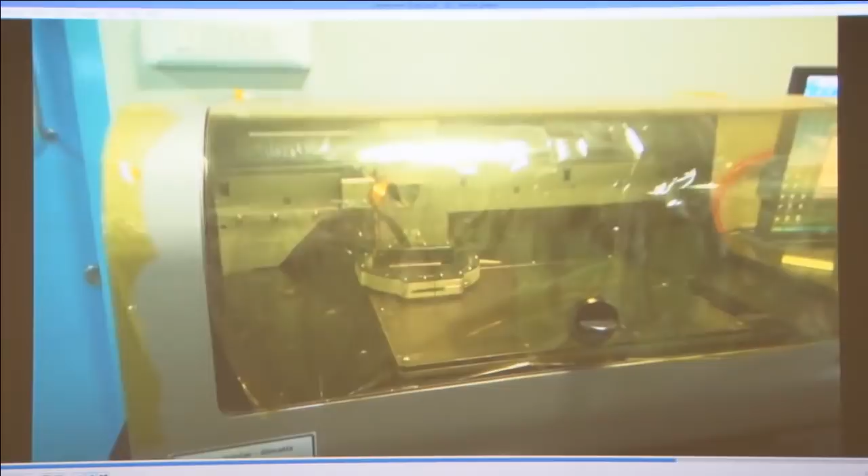Okay, so now we have come to solution processing, not vacuum. And so this is another kind of printing, of big layers that can be printed. This is inkjet printing. Oh no, this is the slot. Okay, so PiXDRO, yeah. So these are printers, and of course the control panels which let you do vacuum.

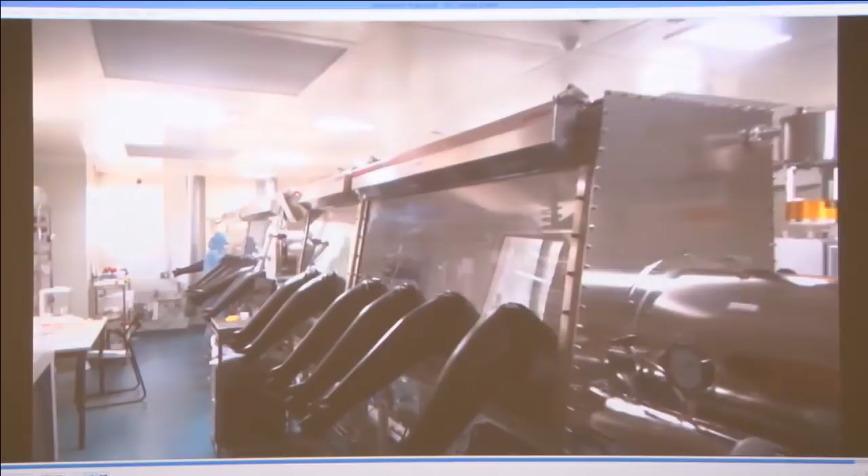So this is 1/3 of our clean room. We have clean rooms in 2 buildings. In this 1/3 I showed you the vacuum equipment, then photolithography equipment, and these are the rows to make the OPV, organic solar cell, a row of glove boxes, such that your device, when it is getting made, does not see oxygen or moisture. So we have a whole row of them, and inside that we process it.

All right. So I have shown you 4 or 5 examples. I have exceeded my time by a few minutes, but if you permit, I can take a few questions. I would like to see 1 or 2 things that are on top of your mind. I have shown you some applications. One of my aims was to make you think what would be an application that you would like to have. People still are looking for applications which will be useful.

So if you can think of an application and I like it, then we'll work with you. So think of an application which would be really useful to you, and you would dream, can I do this? And you can freely ask us if it is possible or not. But at the moment, I'll take 1 or 2 questions quickly, since they have come all the way. Students must ask questions, right?

Sorry? Oh, yeah, yes. The sensors, yeah. That is one of the... yes. Yeah. So, sure, there are many applications, yes. Any other question? One thing that I wanted to tell you as students, okay? Yes.